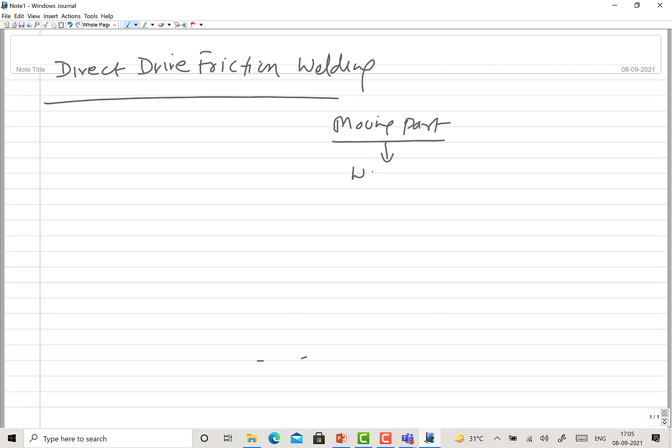The main characteristic of the direct drive friction welding is that the moving part, which is to be joined, is connected to some work holding device. This is again connected to some kind of spindle, which is driven by an electric motor. But between the spindle and electric motor we have the brake and clutch arrangement, so that once the desired friction time and desired temperature has been achieved, the brake can be applied after disengaging.

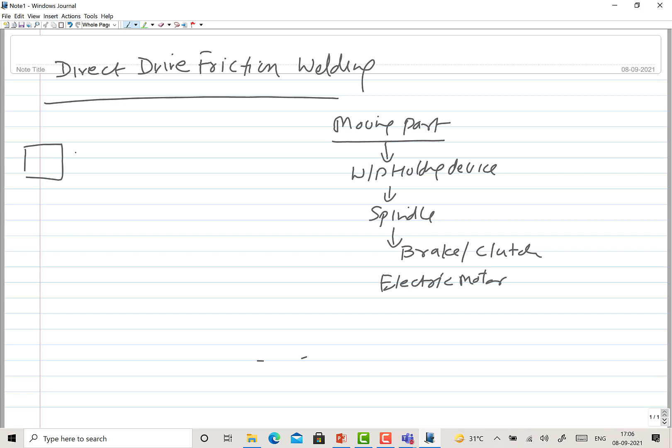So this is the kind of arrangement. You have first the electric motor, and then in between you have the arrangement for brake and clutch. Then you have the spindle, which will be connected to the work holding device, and then the workpiece. So the workpiece is here, work holding device, then the spindle, the brake and clutch, and the electric motor here. This is the kind of setup.

On the other hand, again we have workpiece and work holding device, and a fixed kind of arrangement, from where, using some hydraulic arrangement, the force can be applied. So here we need some kind of axial pressure application arrangement, which is mostly so that you can apply the controlled magnitude of axial pressure, say 5 kilonewton, 10 kilonewton, as per your requirement.

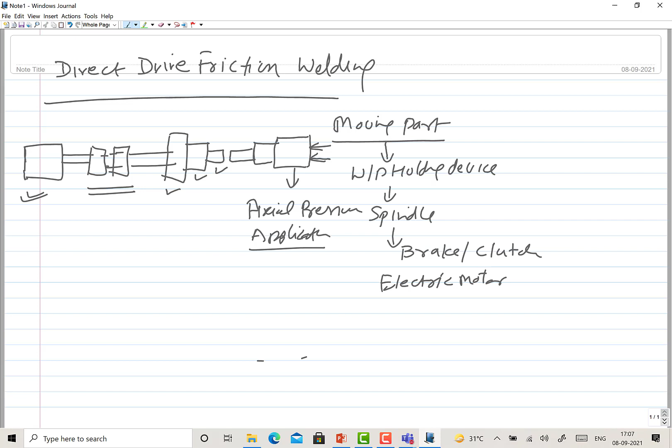Another thing that we need here is some kind of controller which can allow the different stages for friction welding, like how long the workpiece will be rotated to develop the frictional heat. Thereafter it will be disengaged, and then the forging pressure will be applied. So there will be need of controllers for controlling the different aspects of the weld cycle time.

And then we need the displacement controllers for controlling the displacement, so that the predetermined amount of upsetting is realized, in order to achieve the desired upsetting, so that you can develop the desired quality weld joint.

So this is one aspect, and if you want to see this, this is like the electric motor, then the brake and clutch arrangement, and the spindle, work holding device, and the workpiece at both ends. Again the work holding device on this side, and the arrangement for applying the desired pressure.

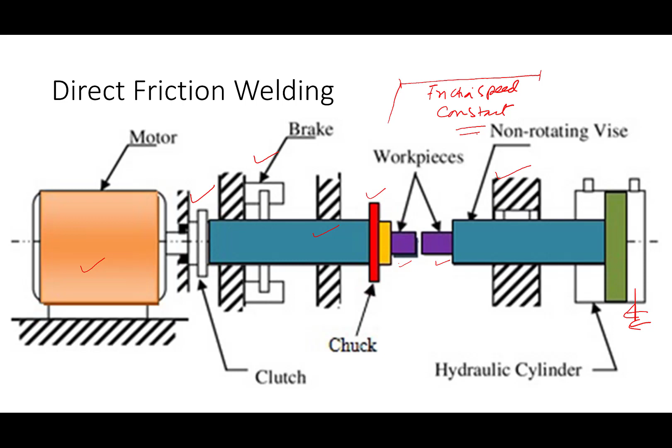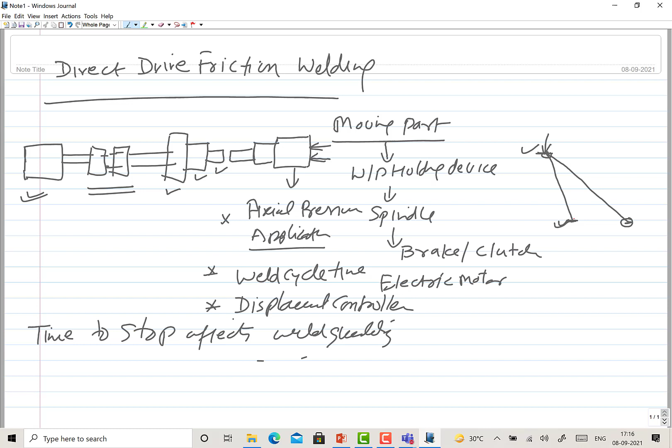Let's say you apply the brake at this stage. Speed gets reduced from a given RPM to nil RPM, and it takes this much time to reach the complete stop. So when the braking is applied, it takes some time to come down, and thereafter you expect that the forging pressure will be applied here or here.

If the forging pressure is applied after a long delay, because you have a longer waiting time when the braking time is more, this will reduce the temperature at the interface. So long braking times are not good, because these will reduce the temperature at the interface by the time the forging pressure is applied. So basically the weld temperature and forging time are both badly compromised when the delay, the time required to stop, is significantly more.

We always expect this is done as quickly as possible so that the forging can be realized when the temperature is high enough, as quickly as possible. That is why the forging phase starts somewhere in between the application of the brake and the complete stopping phase.

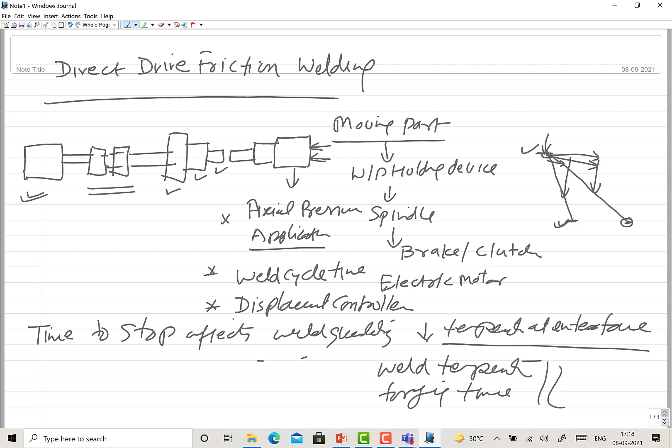Another important thing related with direct friction welding is how the RPM of the moving workpiece is going to affect things. You don't achieve the forging stage until you have the desired temperature at the interface, and the desired temperature at the interface is a function of the frictional heating, and the frictional heating means where it is coming from.

There are three variables that will be affecting the rise in temperature at the interface, and these are the rotational speed...

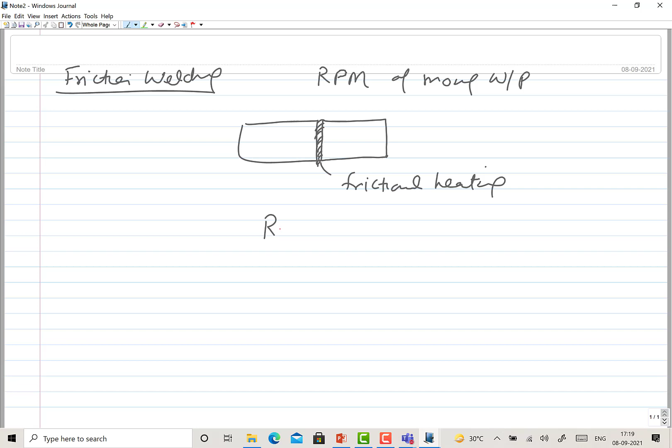Okay, this is one, and then the pressure which is being applied, like the friction pressure, and the time for which this heating is being done. So through the control of all these parameters, see all these parameters are interdependent.

Lower the RPM, you need higher pressure and longer time. Likewise, higher the RPM, you need maybe lesser pressure and lesser time. So a combination of all these three is achieved in such a way that the desired temperature is achieved as

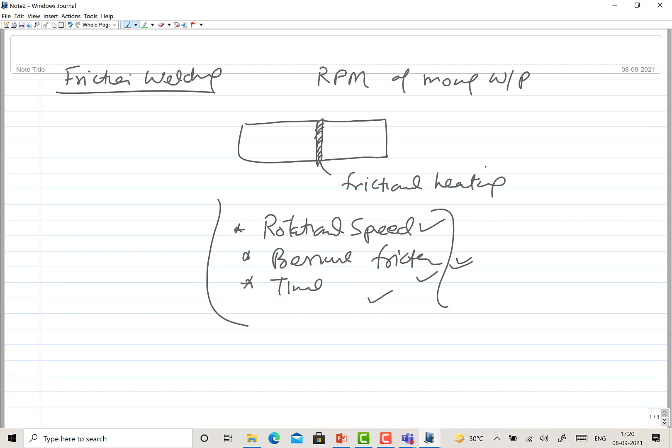fast as possible, because we don't want to have very long frictional heating time. Why? Because let's say you need a temperature of 800 degrees centigrade at the interface. So frictional heat, maybe you can generate at the rate of 2 kilojoule per second, or 0.5 kilojoule.

So it depends on what you can generate, at what rate you can generate, and that will be a function of the rotational speed, friction pressure, and time. So at what rate you are generating - if you are generating at a lower rate, you need longer time. So let me show you another plot.

If you are generating the heat at a higher rate, you need the shorter time. Like the heat generation rate - if you are generating at a higher rate, then you need lesser time. If you are generating the heat at a lower rate, then you need longer time.

Okay, for generating the same amount of heat, the desired amount of heat, so that the predetermined forging temperature can be realized. So there are issues related with the long time and short time.

The short time is beneficial because you are achieving the desired temperature at the interface in a very short time. So heat dissipation to the underlying base metal is very limited, and therefore you get the narrow heat affected zone.

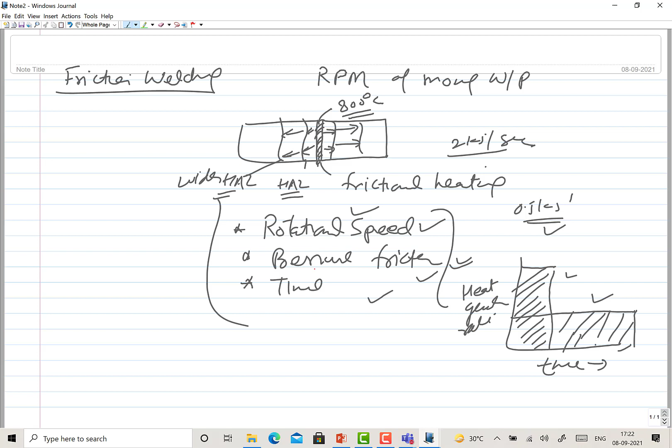Okay, so it is important at what rate you generate the heat, and that significantly determines these two things only, because time is another kind of factor, as we are talking about the rate of heat generation. So the RPM, rotational speed, and the friction pressure that is being applied - these two will be determining the rate at which heat will be generated.

So considering the system capability, considering the forging pressure that you have to apply - there is a limit on the friction pressure that we normally apply. So what is the independent parameter left? You can rotate the sample at say 500, or 1500, or 4000 RPM. That will be changing the rate of heat generation significantly.

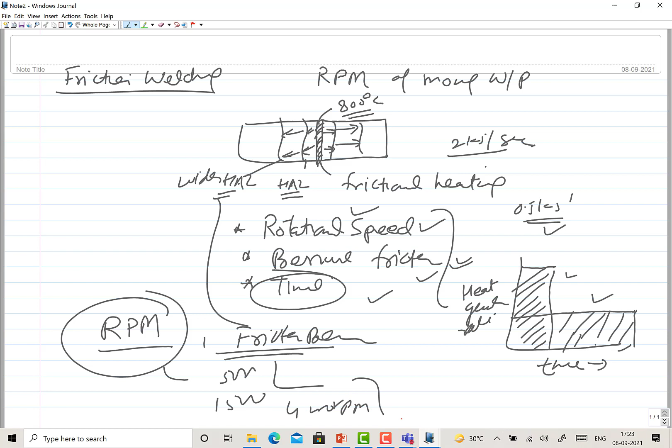So what we do basically, like for steel welding, you may need - let us apply the particular kind of speed for a given size of the job. Say for a given size of the job, the peripheral speed that is normally applied - for steel welding, the typical surface speed which is needed ranges from 75 to 215 meters per minute.

Okay, so that is what you can realize depending upon the kind of RPM being used and the diameter of the job. From pi-d-n you will get the surface speed of the sample during the welding, and the kind of force.

So from this you can determine the rotational speed. And the forging pressure that is applied - the typical friction pressure is 75 MPa, and the forging pressure which is applied is 140 MPa. So these are the kind of typical parameters for steel welding.

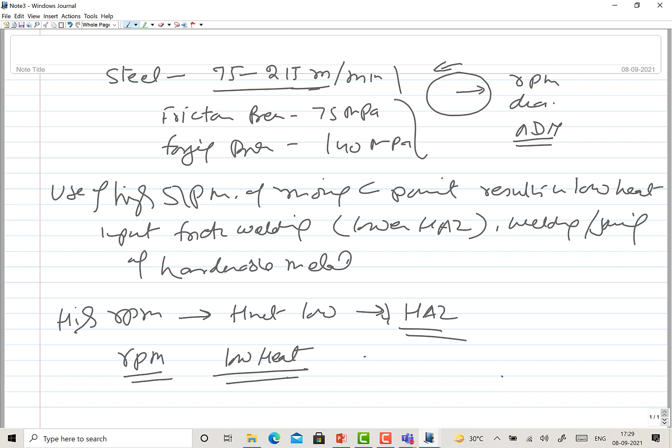So next is, let me see if there's anything else, the process that is the inertia drive friction welding. So as I said, there is a very large size flywheel.

The flywheel is powered by an electric motor, and there is a brake and clutch arrangement connected to the flywheel. Further to the flywheel there will be a spindle, and the spindle will be connected to a work holding device, and the work holding device to the workpiece. So: workpiece, then workpiece holder, then spindle, then flywheel, and then the brake and clutch assembly and electric motor. This is the general arrangement.

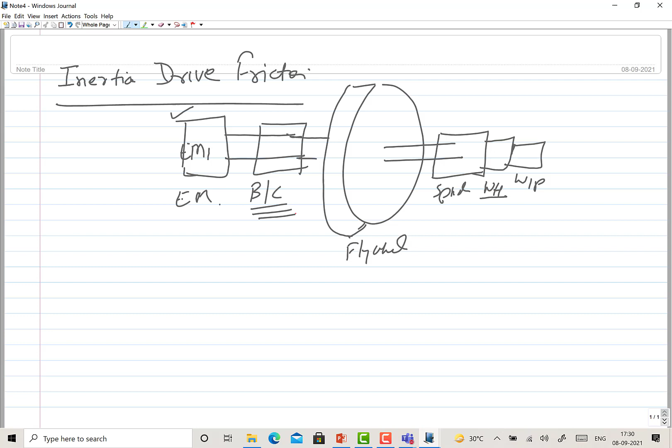So what we do in this process: using the electric motor, you connect the flywheel through the clutch. The clutch helps connect the electric motor with the flywheel, so the flywheel is powered. When you give the power, the flywheel rotates, and you wait until the desired RPM is achieved.

The flywheel is a heavy mass, and the mass of the flywheel you can adjust as per need. Say a typical electric motor rotates at 3000 RPM, just as an example, and you have say 50 kg. You can adjust it to 60 or adjust it to 40.

So how is it done? You keep on adding wheel weights. Say you have one wheel, then another wheel, a smaller wheel, a larger wheel. You keep on adjusting the wheel weights. So basically wheel weights are adjusted in order to adjust the inertia of the wheel.

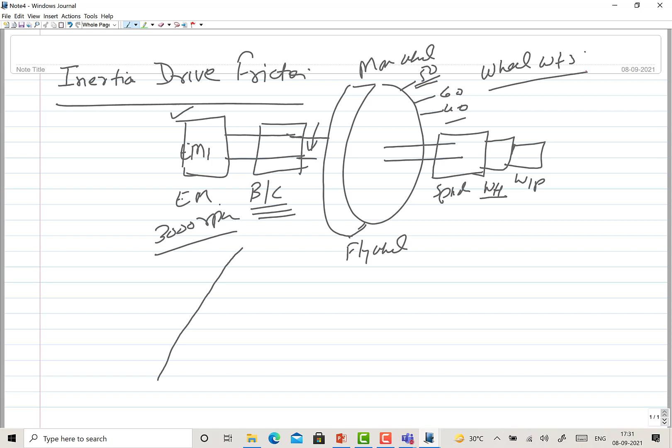So what we do: the wheel RPM is increased initially. Let's see, the wheel RPM starts from 0, and then the maximum RPM to be realized for the flywheel is achieved first. Once you achieve this rotational speed of the flywheel, you disengage the flywheel from the electric motor.

So now you have given enough mechanical energy to the wheel. This energy is identified - basically you try to identify the energy required, the energy to be imparted to the wheel. Once this energy to be imparted to the wheel is identified, in terms of the RPM achieved and the mass of the wheel - these are the two important variables - once it is achieved, you disengage and then apply the friction pressure.

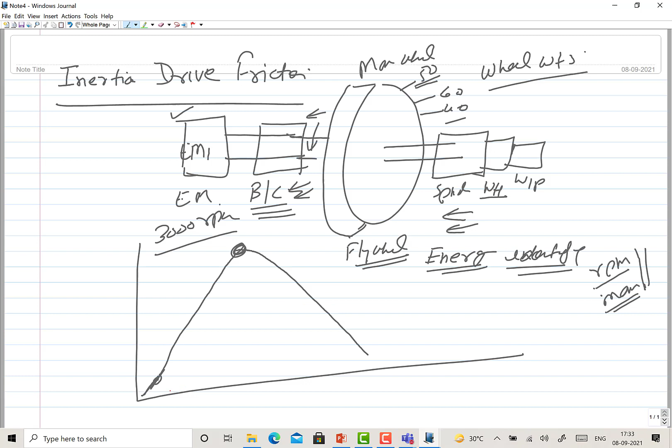So when the friction pressure is applied, the speed will start decreasing, like this. And somewhere in between, when you find that the temperature has risen up to the point where the desired temperature has been achieved, you apply the forging pressure.

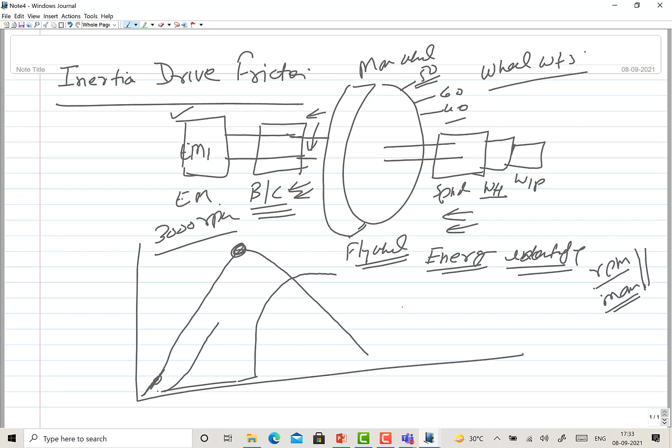I'll explain these things using a simple diagram in the PPT for better clarity. You see, there is a large wheel, which is imparted the desired RPM with the help of an electric motor, and at the other end you have the moving part, and a stationary part is pressed against this moving part.

So initially you give the desired RPM to the rotating wheel, which is coupled with the workpiece. Once the desired RPM has been achieved, you apply the friction - you see, this is the stage. Once you achieve it, then you apply the friction force.

During the friction force, frictional heat is generated and temperature rises, but due to the frictional effect, the RPM of the workpiece or wheel keeps reducing gradually. When sufficient heat has been generated and the desired rise in temperature is achieved, you apply the forging force. There are two variants: in one, the friction welding force is kept same until the end; in the other, upon achieving the desired temperature, the forging force is increased so that upsetting can take place. Initially upsetting is very limited, but once the forging force is applied, significant upsetting occurs.

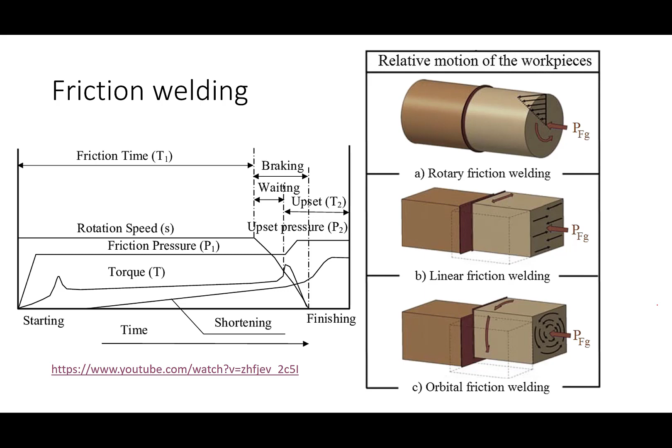This is the inertia friction welding, and if you see, the cycles are completely different. This is the direct drive, this is also direct drive, and if you see the rotational speed and the application of the frictional force, these are a little different.

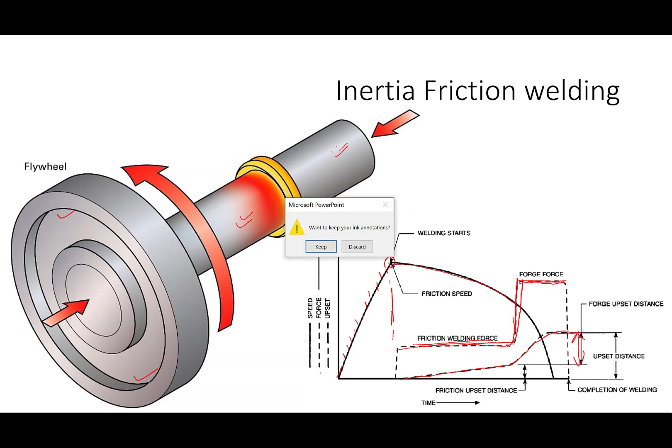So if we have to talk about the differences or comparative study of direct drive and inertia friction welding, what are the things we have here: direct versus inertia.

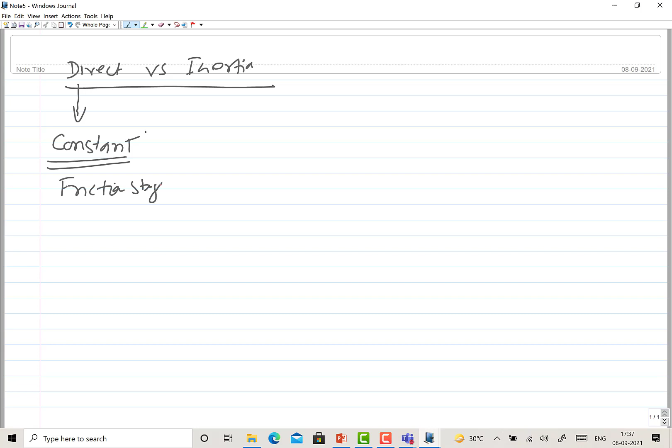In case of direct drive, the rotational speed is constant during the friction stage. On the other hand, in case of inertia welding, the speed is reducing or decelerating during the friction stage. This is one important difference between inertia and direct friction welding.

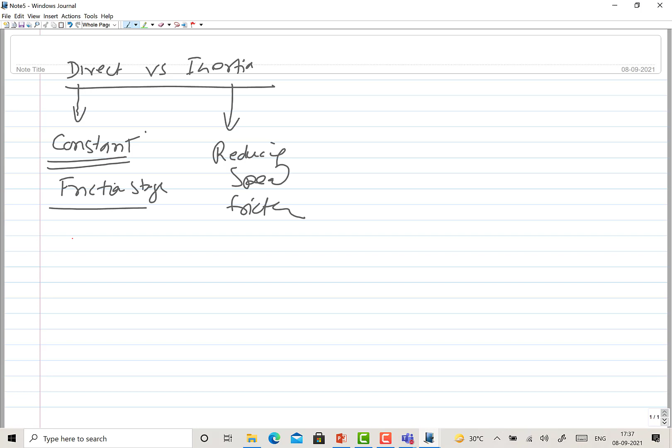What you need more here is good control over the energy being imparted to the flywheel, to control the good quality of the weld. But in case of direct welding, you can continue the frictional heating as per your need, although all those parameters are well identified and optimized so the process can be automated.

Another important thing: the variables in inertia welding are the wheel size or mass being applied, the rotational speed you are going to realize, and the axial force you are going to apply.

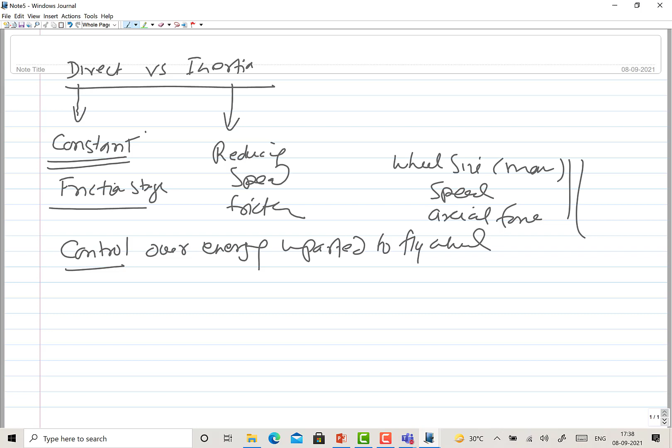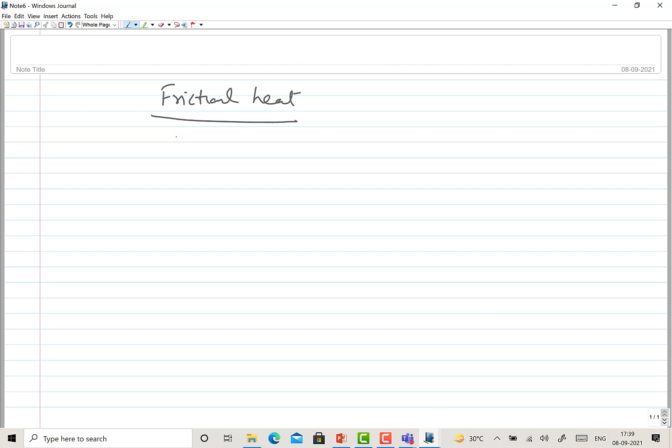There is another important aspect about friction welding. As seen, there are stages like frictional heating. Once the desired temperature has been achieved at the interface during frictional heating, you start applying the forging force and pressure so upsetting can be realized, and at the end of frictional heating, when you apply forging, the temperature should start coming down.

This is the frictional heating stage. Once frictional heating has stopped and forging is taking place, temperature should come down. It will be coming down gradually in the braking phase for direct drive, but there is no braking phase in the inertia drive. The speed of the moving workpiece reduces on its own during both the friction stage and the forging stage.

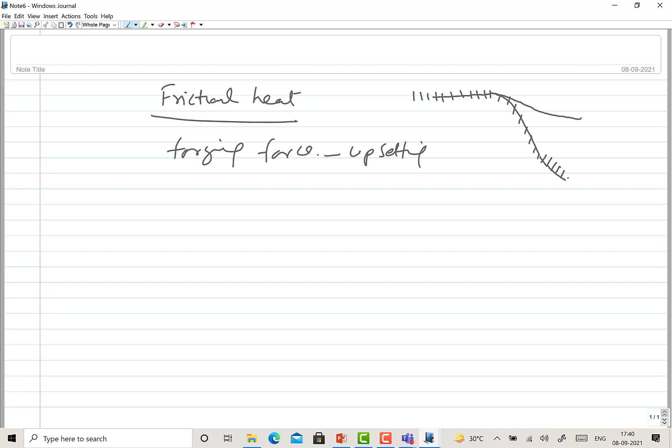Instead of temperature coming down easily, it holds up in the forging stage -- it doesn't drop rapidly. Any reason for this? You see, frictional heating has been stopped, so temperature should come down rapidly depending on the cooling rates imposed during upsetting. But the temperature doesn't drop that rapidly; it holds for a while, reducing gradually rather than rapidly, in the upsetting stage. Can anybody comment on this situation?

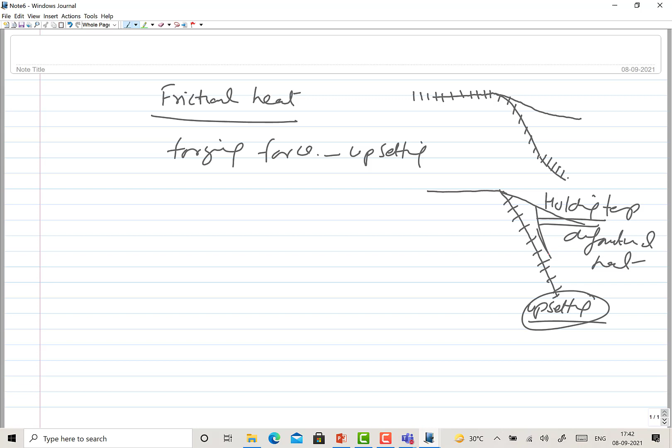Now coming to different aspects related to friction welding, the metallurgical aspects of friction welding. Friction welding can be used for both similar metal joining and dissimilar metal joining. Initially we'll talk about similar metal joining.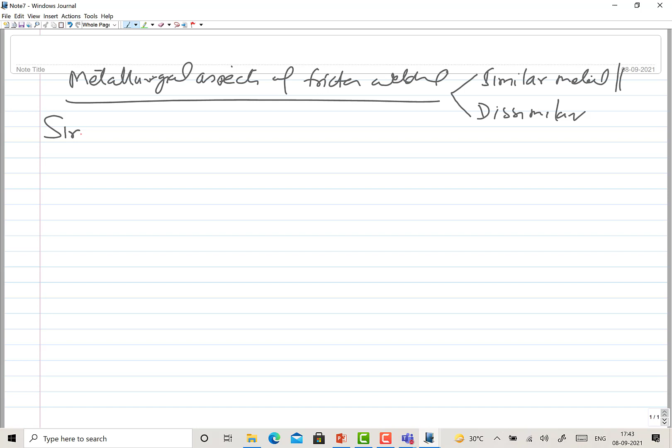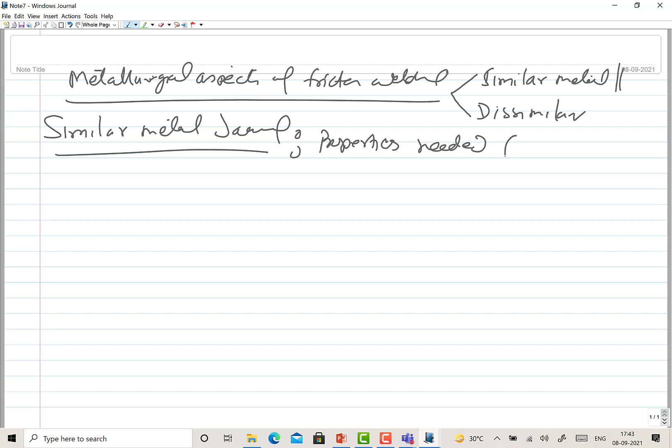Similar metal joining - what do we need as far as the metallurgical characteristics or metal properties are concerned? What properties are of great importance for facilitating friction welding? So, simple properties needed for friction welding.

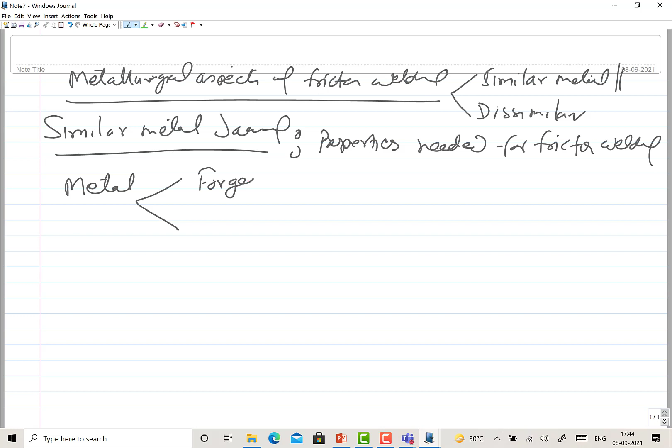There are basically two properties crucial for similar metal joining. One is forgeability - everybody will agree there should be some percentage of elongation or ductility. At the same time, moderate, if not very low, yield strength. If it is low, it is good.

But what about those which don't have these characteristics, like ceramic to ceramic, cast iron to cast iron, or cemented carbide? You cannot do friction welding for these similar metals. Certainly, if you have a softer metal, then these materials can be joined with soft metals - so you need another soft metal for joining, like ceramic to soft metal, or cast iron or cemented carbide with a softer metal. Probably you can do it, at least one which can participate in the joining process. This is one.

Second, all metals do not contribute effectively in friction welding. Why? Because what is the most prerequisite thing in friction welding, apart from ductility and forgeability? Now this is an important thing - I want your inputs or thought process. What is, after the forgeability of a metal, the next important thing to develop a friction weld?

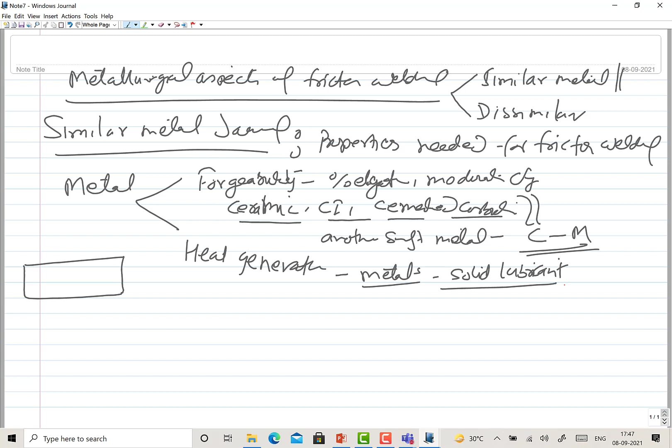So certainly it is the metal's ability to generate heat. There are multiple metals which come with solid lubricants, and if the metals have solid lubricants, they cannot contribute much in friction welding. For example, there is free machining steel, which is intentionally added with a high percentage - like 3%, 5%, 2% - of sulfur and lead. Addition of these elements helps in breaking the chips. Likewise, if the metal has a high percentage of graphite, that also acts as a solid lubricant.

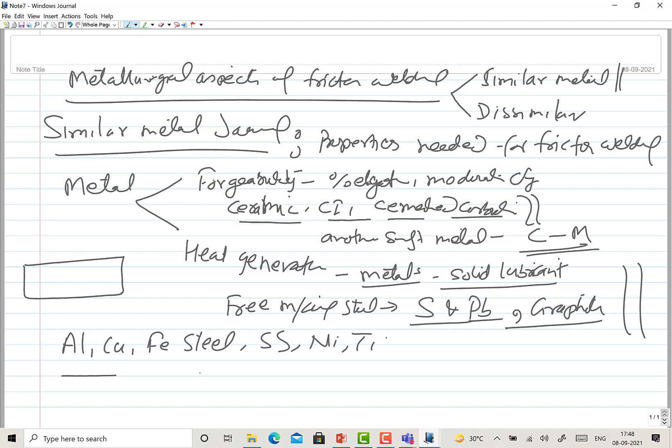So if metals have solid lubricants, how can they generate frictional heat? The metals should have the ability to generate frictional heat, and those which cannot do this cannot be friction welded. So the common metals - there is a huge family which can be welded, like copper, copper alloys, iron, especially steels, stainless steel, nickel, titanium - all these can be friction welded easily.

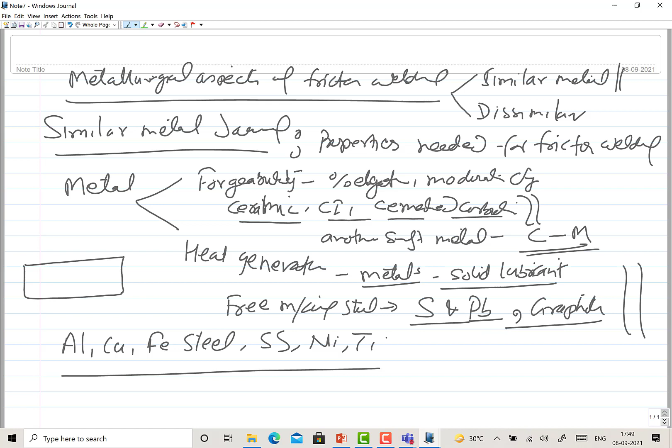Coming to another important thing related with similar metal joining, which goes in favor of friction welding only - similar metal joining using friction welding is workable. Why? Because if you have these components of similar metal joining using friction welding, here you have got the friction weld - whatever affects one side, the other side is affected in the same way. So at least you are getting either hardening or softening, the same for both sides. This is good.

Similarly, whatever is the kind of heat dissipation on one side, because of equal K, you are having equal heat affected zone on both sides - same HAZ, same hardening and softening.

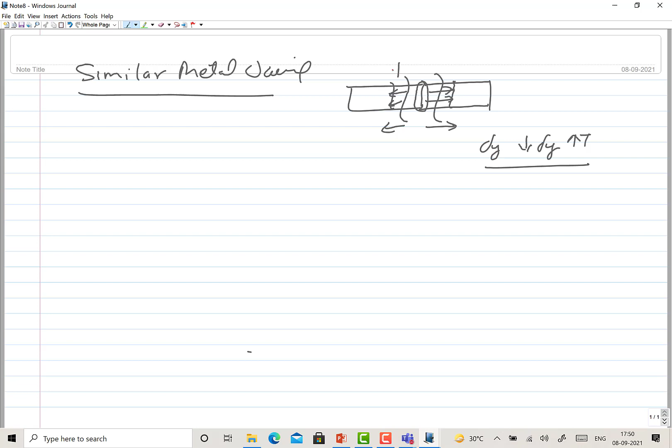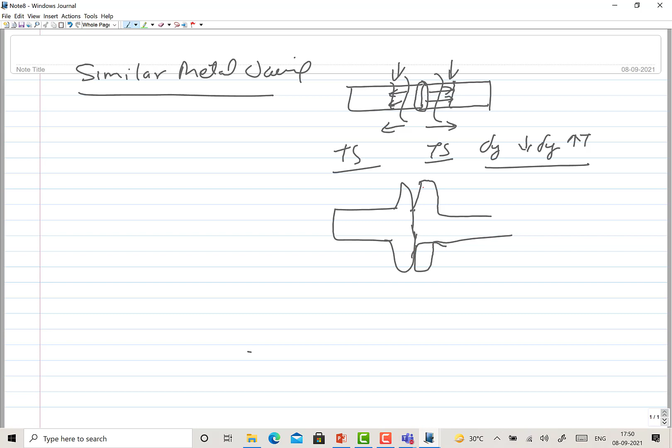Since both metals are the same, the drop in yield strength due to rise in temperature is the same on both sides. So if thermal softening is equal on both sides, you can expect upsetting to be the same on both sides, with the same magnitude. If upsetting is equal both sides, there is at least symmetry in development of the weld. Similarly, the expansion taking place on one side is the same as on the other side, so there is no differential expansion and contraction. This is not a major problem in similar metal joining. The HAZ is equal, hardening and softening are the same, the weld is symmetrical, and upsetting is symmetrical.

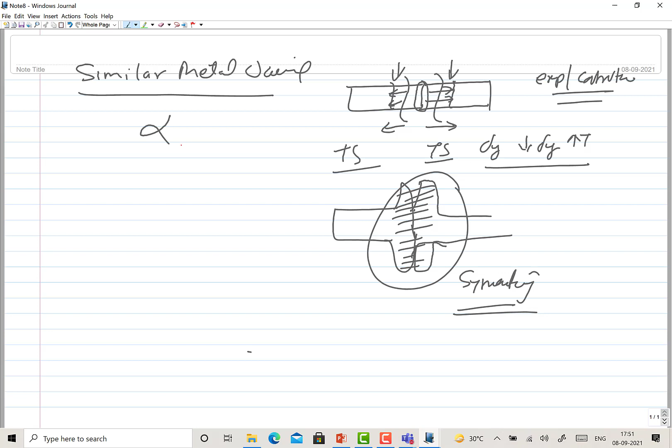But in dissimilar metal joining, all things are different. Alpha is different, K is different, yield strength is different, thermal softening is different, and that is why you find varying HAZ, with softening in one place and hardening in another. Somewhere there is more upsetting, on the other side less upsetting, so you end up with an asymmetrical weld. These are the issues you come across in friction welding, apart from the metallurgical issues at the interface. I will talk about the dissimilar case a little later.

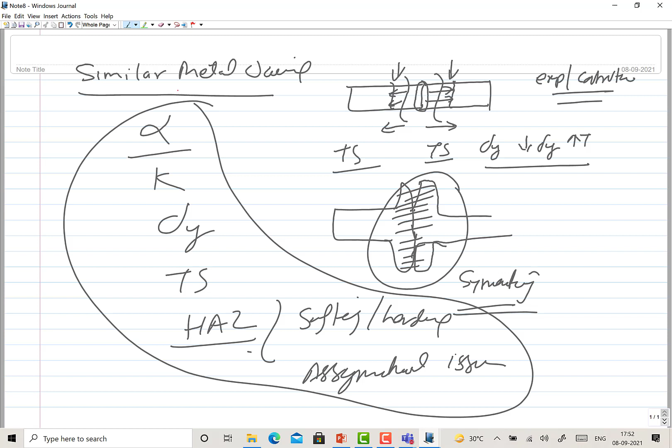So these are the good things. Whatever changes take place in similar metal joining are the same - hardening, softening, HAZ, or upsetting - all equal on both sides.

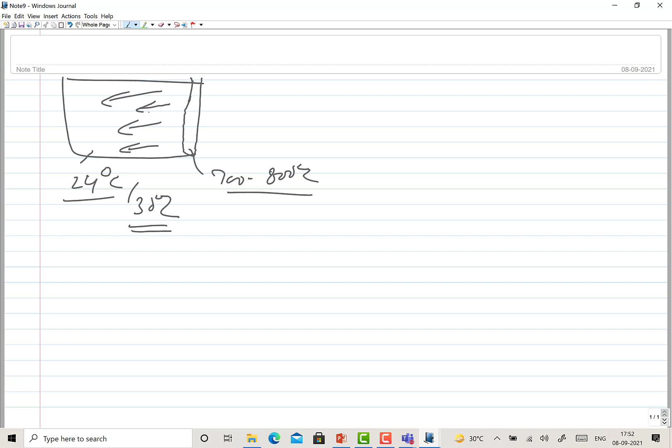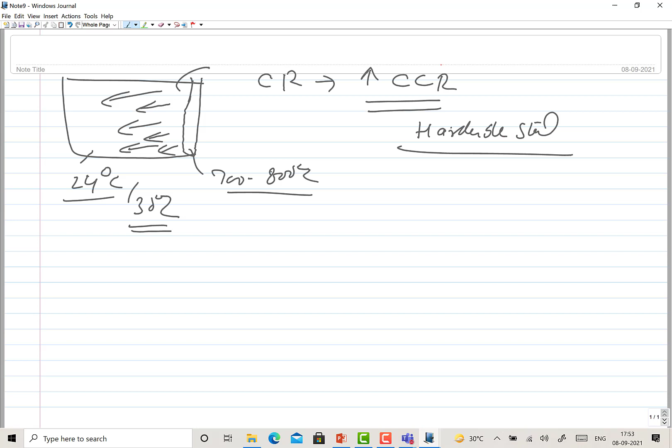But still, you have a large mass of metal behind the interface. The interface is heated to, say, 700 or 800 degrees centigrade, while below that the base metal is at 25 or 30 degrees centigrade. This large mass extracts or sucks the heat very rapidly, transferring heat away from the interface quickly. That is why the cooling rates experienced are usually greater than the critical cooling rate, especially for hardenable steels.

So hardenable steels experiencing a cooling rate greater than the critical cooling rate in the vicinity of the weld interface can certainly be expected to show hardening of the HAZ, along with embrittlement or loss of toughness. These are issues in friction welding of hardenable steel. Any steel with carbon equivalent greater than 0.3 or 0.35 will need some precaution to restore properties, because this can lead to embrittlement and hardening of the heat affected zone.

There is no fusion zone, so the heat affected zone, including the interface, needs to be corrected or rectified for more favorable properties. That is why hardenable steel friction welds need post-weld heat treatment, so you can restore elongation or ductility, reduce residual stresses through stress relieving, and improve toughness through tempering. These are different heat treatments for improving toughness, such as stress relieving.

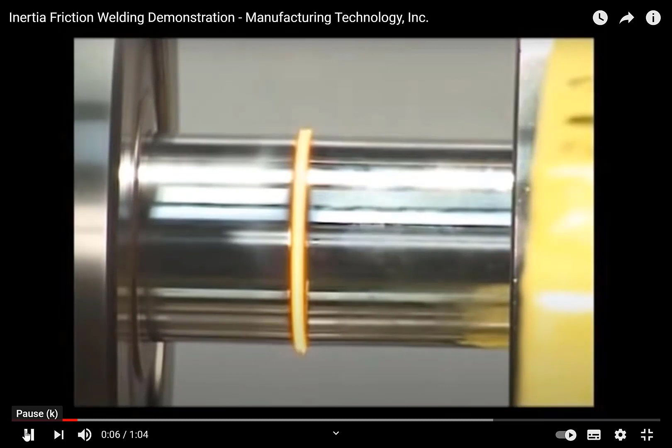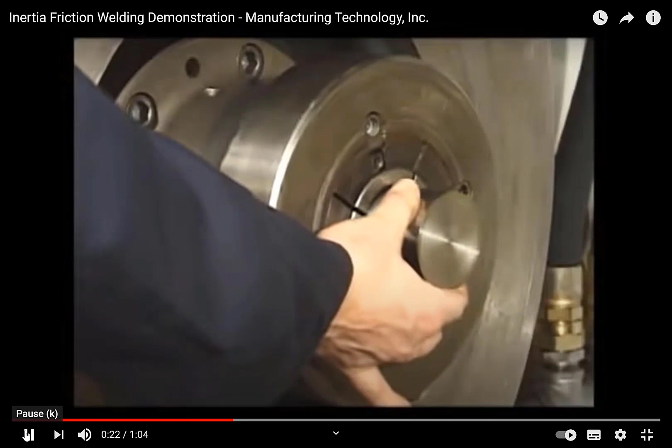How does inertia welding work? Basically, by forcing together pieces to be joined in such a way that rotary motion and pressure are converted into heat, which literally bonds the pieces into one part. Two pieces to be joined are aligned in an inertia welding machine. One piece is held stationary while the other is rotated rapidly on a spindle chuck attached to a flywheel. When the flywheel reaches a predetermined speed, it is disengaged and the freewheeling piece is forced against the stationary piece. Friction between the parts heats the abutting surfaces to forging temperature. Just before rotation ceases, the two pieces bond automatically. When the flywheel stops, the weld is complete.

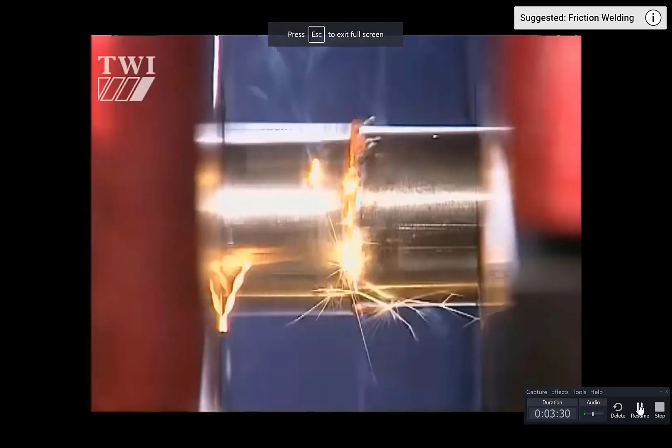Low-cost linear friction welding is an area TWI has been interested in for some time under the LINFRIC project.